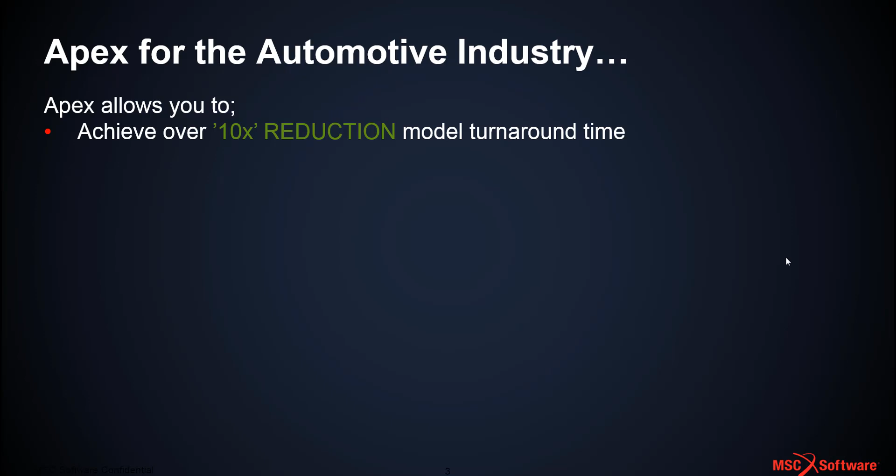Apex for the automotive industry. Apex allows you to achieve a 10x reduction in model turnaround time, so massive efficiency gains both in terms of the power of the software and also the flexibility offered by very many of the functions in Apex.

It makes the user experience enjoyable, so many users see Apex as very easy to learn, easy to use. Many people liken it to using a video game in terms of how enjoyable it is. It opens up the analysis process to non-specialists, so junior engineers and non-FEA specialists can become productive with Apex very quickly and perform many aspects of the FEA and CAE model build task.

It gives flexible license access across the MSC One licensing portfolio, so floating license availability and the ability to open up other MSC software technologies such as MSC Nastran, Marc and Adams multi-body dynamics.

It integrates radically powerful FEA and automation techniques into flexible architecture, so many patented and novel technologies, direct modelling focused specifically for CAE and FEA model build, generative model framework where any modification upstream is washed down, so we've got minimal user input, and we've also got a very powerful automation base using the Python technology built into Apex.

These capabilities are very prevalent in the automotive industry, and we all know how important robust FEA is within that development process. Apex gives you the design freedom to develop your current and future products in a manner you have never seen before, and I want to sort of highlight that.

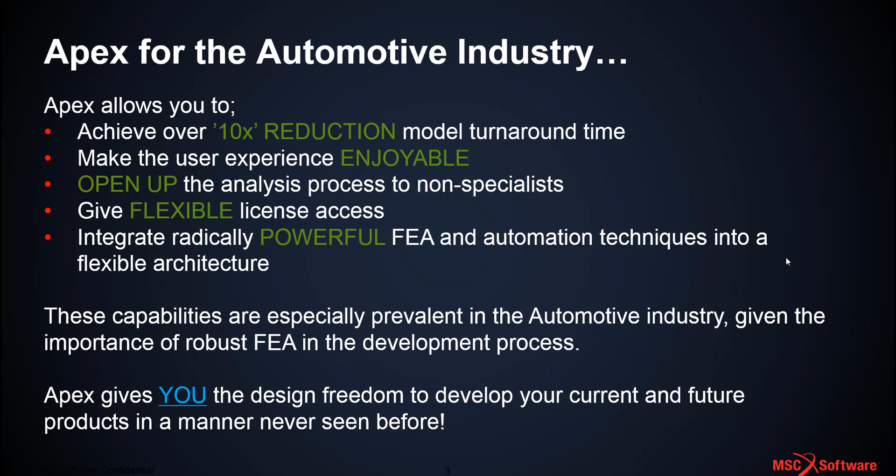The efficiency gains and the power of Apex means that you can build models, analyse and understand how a structure is going to work far more quickly and efficiently over anything else you've ever seen.

The Apex journey. So early versions of Apex were easy to use, easy to learn. They were focused on a CAD to mesh type paradigm, so import geometry and then kick out a Nastran bulk data file. Then the software has evolved to include the Apex structures simulation environment.

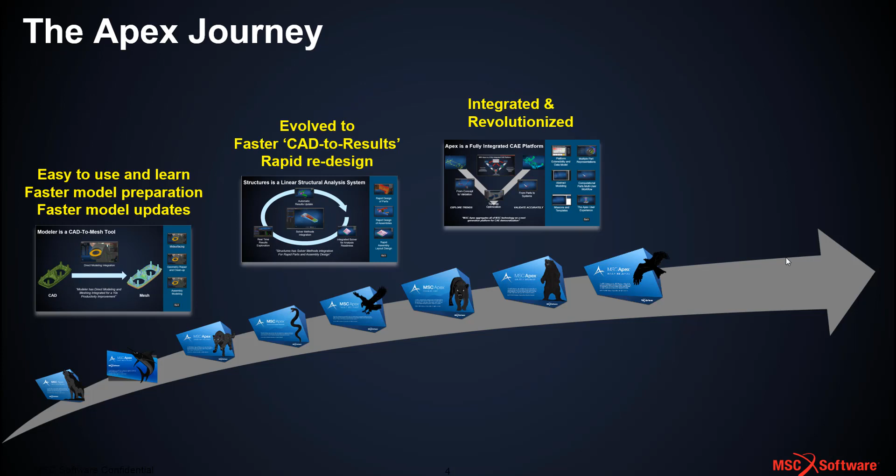So you can actually go from CAD to results in a very rapid time frame, allowing rapid redesign and what-if scenarios. Then the platform has been integrated and revolutionized with the advent of the Python automation technology, so you can automate, black box and customize the environment.

But then there's been a paradigm shift in terms of the way Apex is developed and positioned, to now include, for this release, Apex Iberian Lynx, the concept of gateway to Nastran through a series of interoperability enhancements. So now Apex can talk to Nastran both as a preprocessor and also as a post-processor.

With Iberian Lynx, this is all now possible.

So workflow maturity: a legacy approach used Patran or some other third-party tool for both pre and post, wrapped around MSC Nastran. As Apex evolved, it came in as a companion tool, which means you can go CAD to mesh effectively, then drop that into Patran or a third-party tool as a preprocessor, and then onto Nastran and Patran again for post-processing.

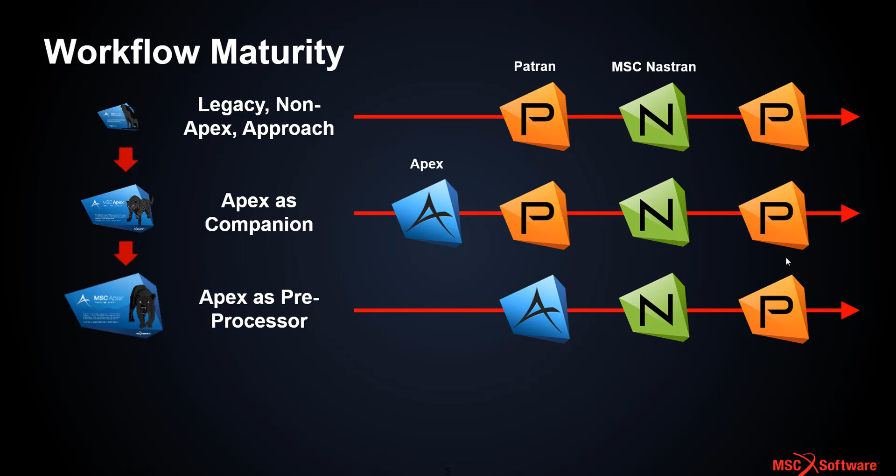Then Apex became a full preprocessor, so you can do all of your model build, analysis and load case setup within the Apex environment, solve externally, but then still have to post-process in a third-party tool.

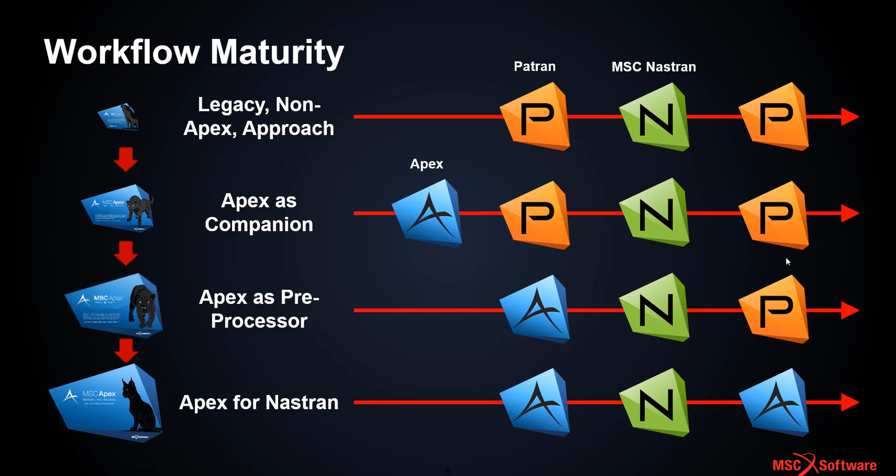But now, where we are with the Apex for Nastran functionality, we've got the capability to do full model build, full load case definition, full scenario setup, Nastran external solve, and then full post-process and result simulation within the Apex environment. Functionality growth - going through this pretty quickly.

So the early versions of Apex using the companion mode had some keyword support for a CAD to mesh type operation, but as Apex has matured, we've included more analysis setup and solution types, primarily by using Apex as a full preprocessor.

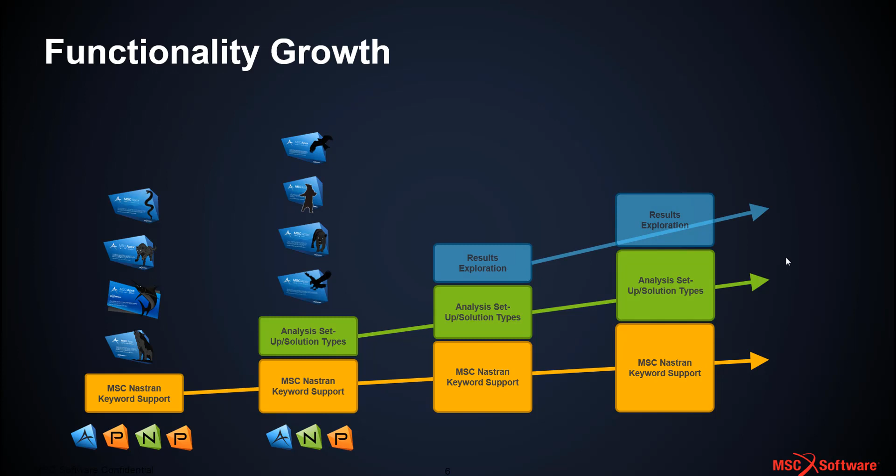And now with the advent of MSC Apex Iberian Lynx, where we can support all of the preprocessor phase and pretty much all of the post-processing and result exploration phase, we've got a much more full user experience and workflow.

Result exploration, as shown, is increasing with future releases, and orphan mesh control is increasing with future releases. Orphan mesh definition is where you work on a model where you've only got legacy Nastran bulk data file definition - you don't have geometry, so you need to use the original mesh as topology for subsequent updates and modifications.

So how can Apex improve your productivity? Apex is now implicit in your MSC Nastran workflow. In simple terms, you can ditch your other third-party or Patran toolsets for Apex Iberian Lynx to become your main CAE workhorse.

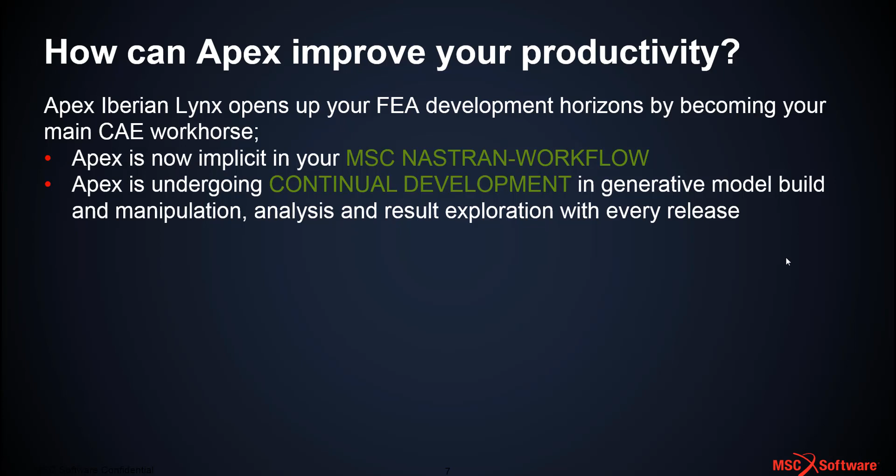Apex is undergoing continual development in model build and manipulation, analysis and result exploration, with significant functionality improvements and enhancements with every release. The Python-based automation environment now offers build, but also analysis and result exploration, which is new to Iberian Lynx, all enabled through the customizable user-defined tool and graphical user interface functionality.

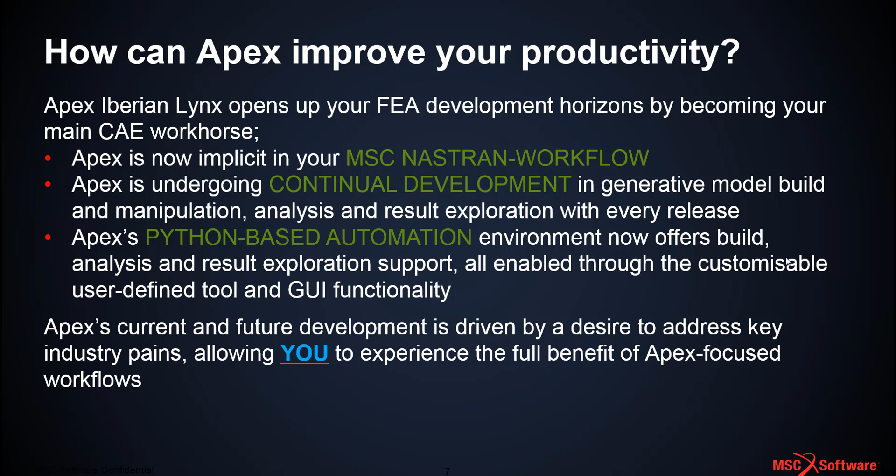Apex's current and future development is driven by a desire to address key industry pains, allowing you to experience the full benefit of Apex-focused workflows.

So we'll move on to a couple of examples focused specifically on the automotive industry, and I've tried to highlight models which will be of interest and highlight some of the capabilities that Apex has got.

So just looking at this assembly brought in from a Parasolid CAD definition within the Apex environment, fairly complex, a number of parts, maybe 20 or 30 or so discrete parts within that. So Apex brings in the geometry and understands the full product assembly architecture, both in terms of parts and sub-assemblies.

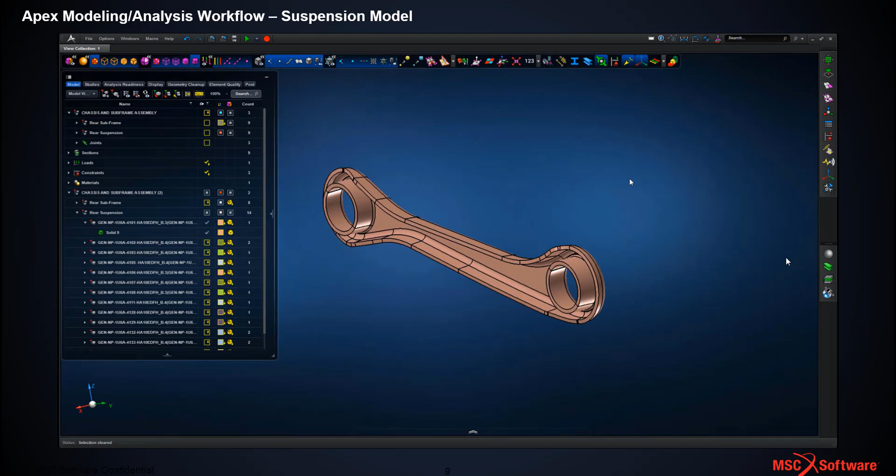Looking at the lower control arm, we're going to focus on part of the model build at that level just to get started. So if you've never seen Apex before, just a quick intro to some of the model build analysis setup tools. So, mid-surfacing operation - we've pulled the mid-surface and calculated the equivalent shell thickness for that mid-surface.

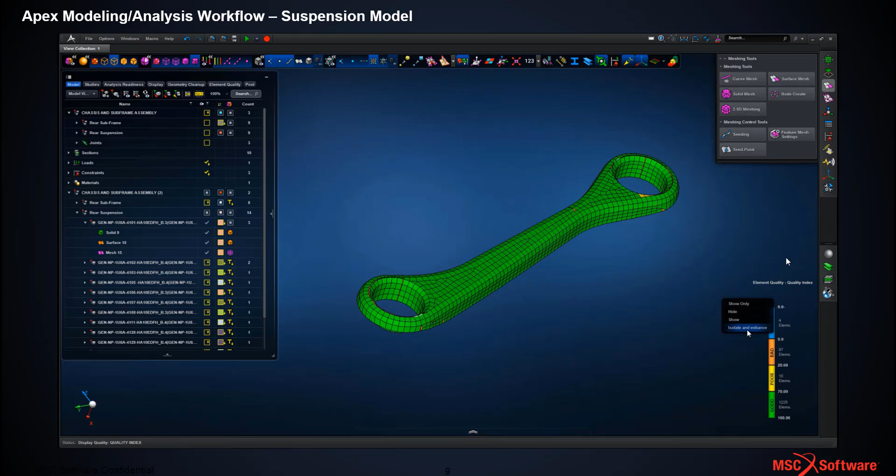We're going to shell mesh that surface, show the elements that generated, and do a quick element quality verification on that definition. Apex has very powerful quality and model update tools.

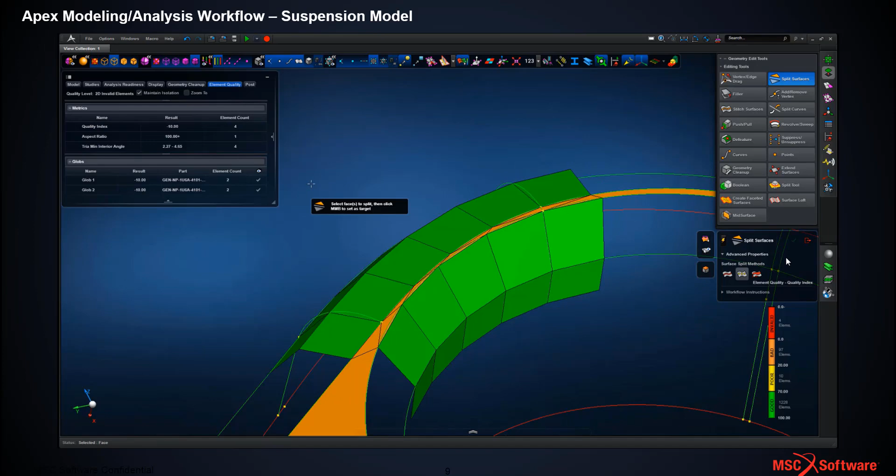So we can see here we've got some invalid elements, very poor quality in certain regions, and we can see those highlighted. So the generative nature of Apex means that we can split surfaces, which in turn update the geometry, the properties, the mesh in a generative framework, and we can see that live in terms of the element quality check. So those elements disappear because they're now good quality, and we repeat that for a second portion of the model.

So we make these splits, and again, minimal mouse clicks, minimal form interaction, controlled pretty much completely from the mouse. We can now see we have good quality elements everywhere, or rather no poor quality elements, I should say. So this model definition is good to go.

So one of the neat tricks within Apex is that we've got the ability to verify using the embedded Apex solver. So we can just look at the shell thicknesses first of all, an element normal check just to ensure that we've got element normal consistency.

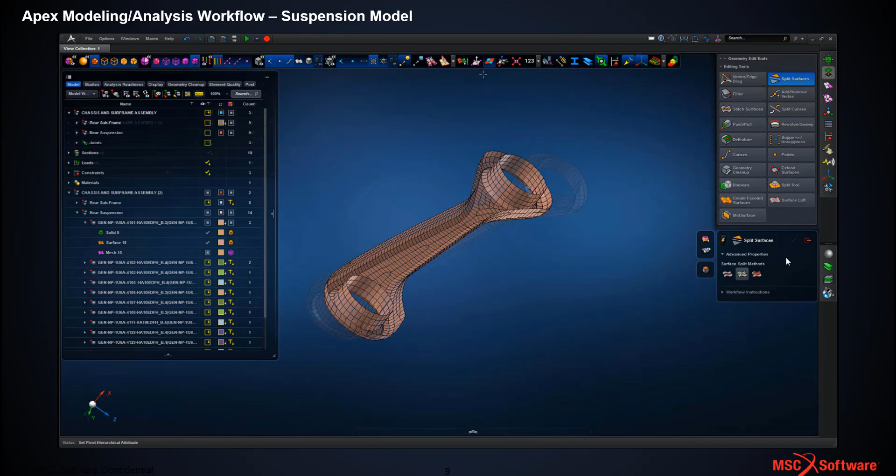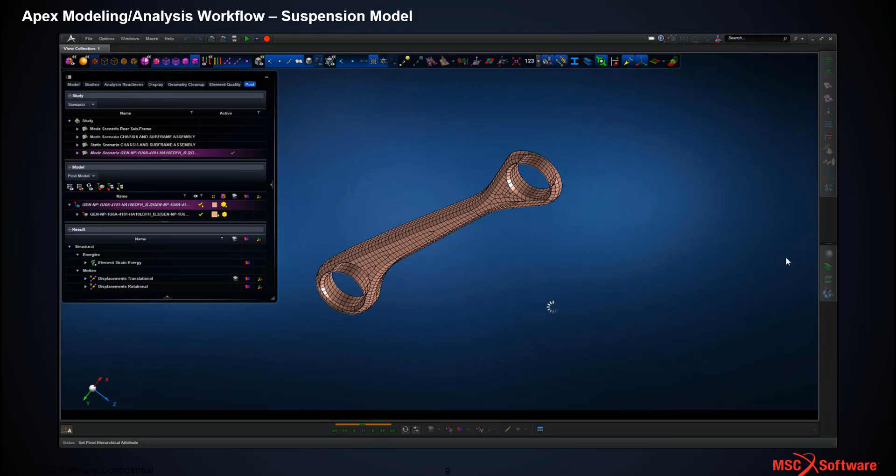Obviously that's important given that we're using shell elements, and we can now verify the response of that single part within the sub-assembly using the Apex embedded solver, looking at normal modes, free analysis, run the solution very quickly, and see the influence that structure would have, just to make sure that it's tied together properly and responds from an analysis perspective as we so desire.

And we can see here we've got for a free modal analysis, 6 rigid body modes and then 7 plus flexible body modes, and we can see that the structure is working as we would expect.

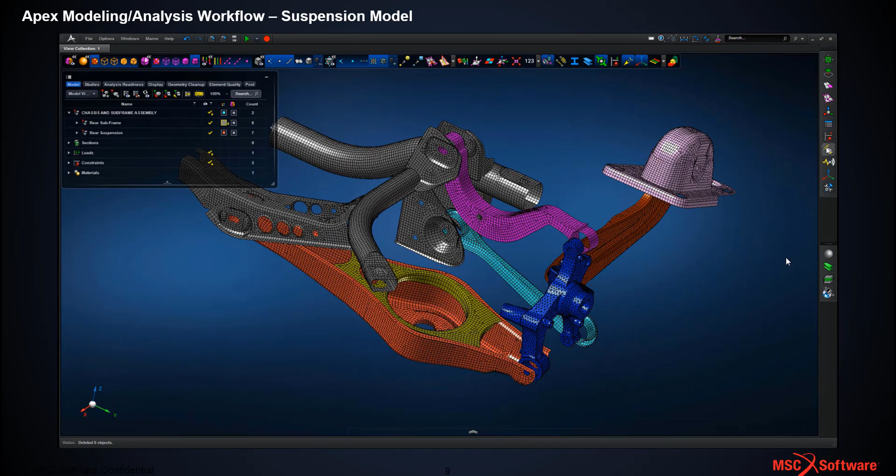So once we've got that part verified, we can quickly build the other parts through a mid-surfacing or solid mesh focus. We need to tie these entities together.

So just tie these - we've got some welded entities at this particular component pair. So we've just used the Apex glue technology just to tie those together, and we can change the tolerances to better control those interfaces. We can use the concept of a joint definition to tie, in this instance, the pink region to the blue region using a revolute joint.

We've got many different joint types in Apex.

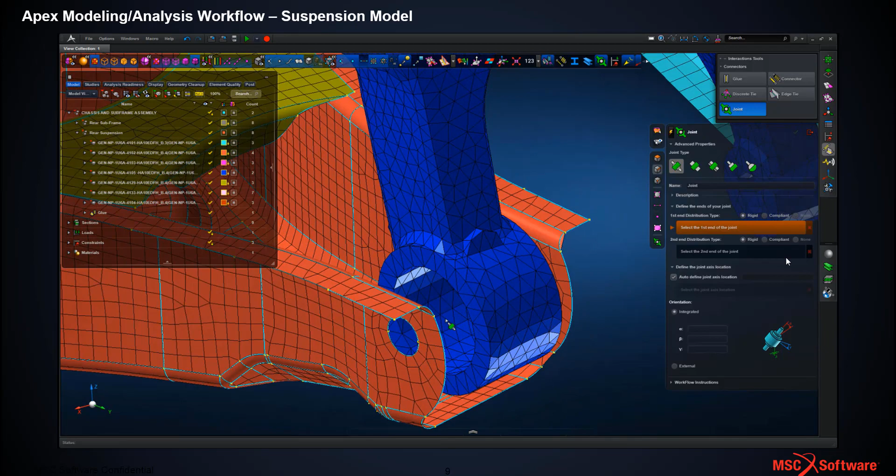So just pick the entities at one end we want connected. So these will be the internal bores of the holes for the pink surface.

So this is effectively generating a fastener stroke bearing interface to give us the revolute behavior. So pick the solid face of the blue component, middle mouse button to accept. We've got the ability to modify the position and the orientation, but by default these are concentric holes, so no manual input used whatsoever, and we've got that joint defined.

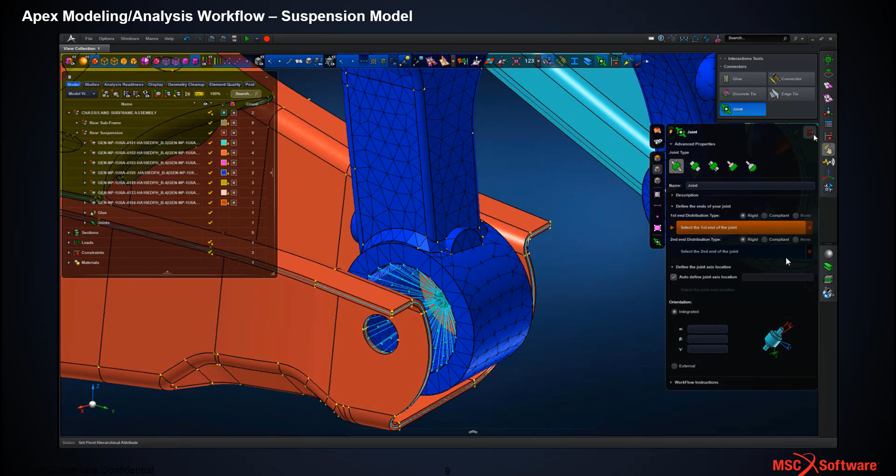The generative behavior of Apex means that if we were to remesh or modify one of these pieces of geometry, then the resultant mesh and joint definitions and all connection updates or connection definitions will be updated. So just refining that mesh to a 2mm edge length, and we can now see that joint is still robust within that definition, and that goes for all entities or connection types in Apex.

Running quick normal modes analysis, we can see that the structure is working as we expect, and we've got no moment transfer at the Revolute joints. We can look at the strain energy distribution just to understand where some of those structures would see high stresses if it was a true vibration case.

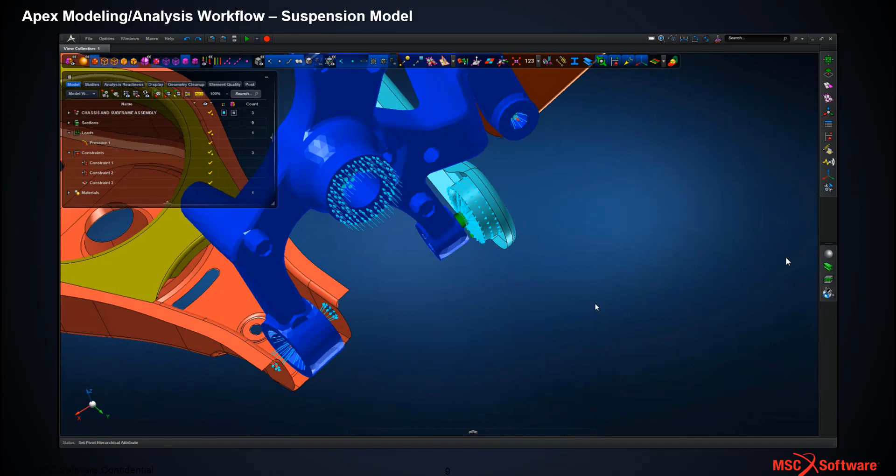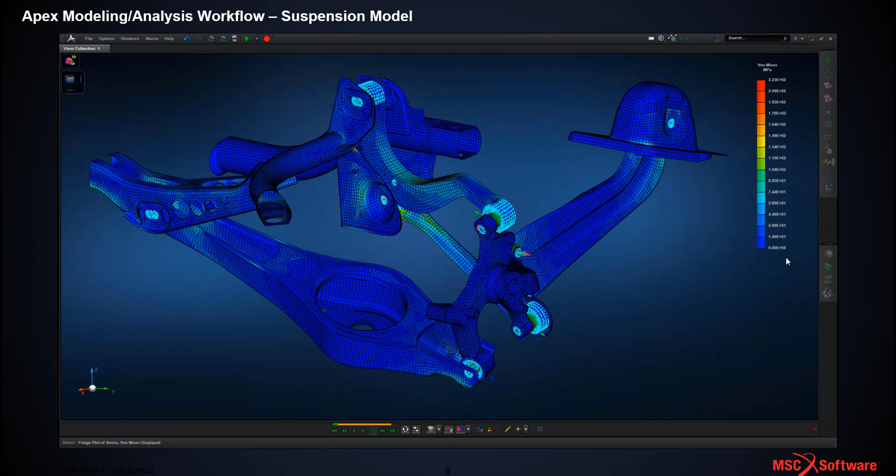Then we can look at the static output, so we've got a pressure load defined, some fixity constraints, and a symmetry constraint, as we can see here. Run the analysis, look at the deformations, and then we can start to pull the discrete stresses out for the full structure or for the lower control arm that might be a region of interest, and then we can go through the design iteration loop to update anything we might need to. So pretty straightforward from a build perspective.

So looking at the MSC Nastran workflow, specifically focused around Apex. Apex is fundamental to your Nastran workflow by having enhanced Nastran keyword support for both model import and export. We've got MSC Nastran HDF5 results out interrogation, which means we can now read results in, and we've got powerful result automation, result exploration and automation capabilities.

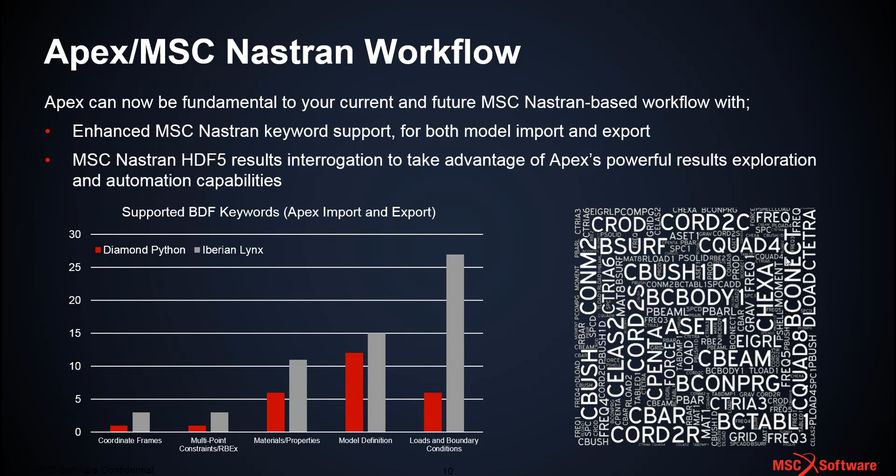Quick infographic here just to show how, on the left hand side, the number of BDF keywords are supported both for import and export within Apex. Diamond Python, shown in red, is one of the earlier releases, and Iberian Lynx is shown in grey. So the functionality enhancement, or number of keywords that are now supported, has grown hugely across those releases. We can now support coordinate frames, multi-point constraints, materials and properties, model definition, and loads and boundary conditions.

Moving into the next workflow example, the chassis model. We've got some assembly geometry read in from an external CAD source, and the assembly architecture has been fully defined and respected within the model browser tree. We've mid-surfaced and manipulated those geometries to give us a more simplified version, and then looking at the underlying mesh, we can see what that structure would look like.

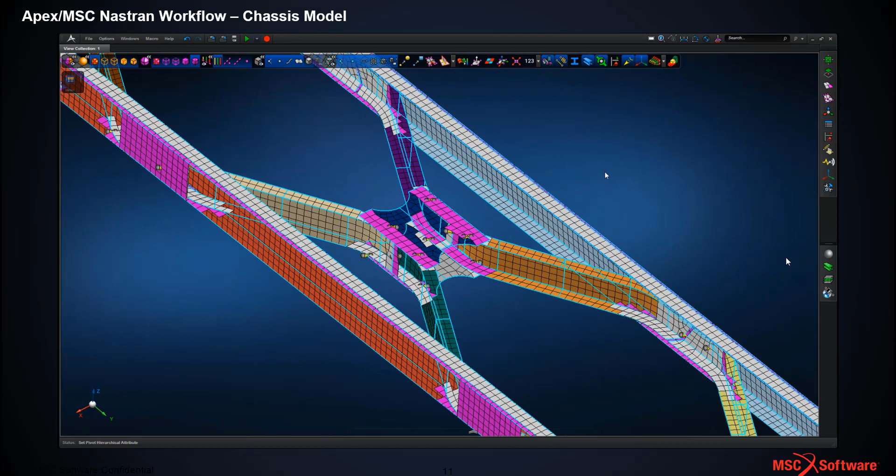We can show the equivalent shell thickness for those entities, and also look at things like glued contact. Because this is a meshless contact, we can build very quickly without having to ensure congruency of nodes and elements across the interface. We could ensure those congruencies if necessary, but we're using glue in this case for speed.

So one of the sub-assemblies, we've got glue at the sub-assembly level, so we've got 4 cross braces and a cover plate, or a series of cover plates, connecting those together.

Once we've got that definition, we can now run the full job. Just a quick check on element quality: massively dominated by good quality elements. We've got no invalid elements which would stop the analysis from running.

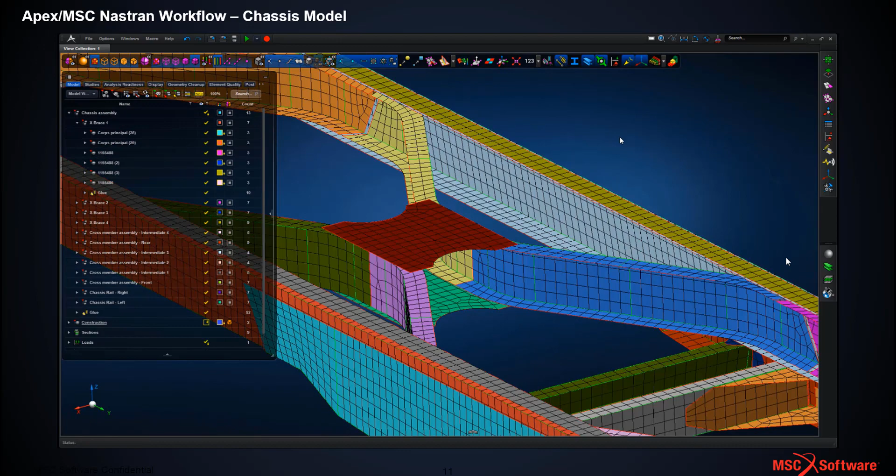We can now define our loads and boundary conditions and our loading environment. We can modify any of these at any given time, so we've got full flexibility based on the generative model description. Once we're ready to go, we can then run our external MSC Nastran analysis.

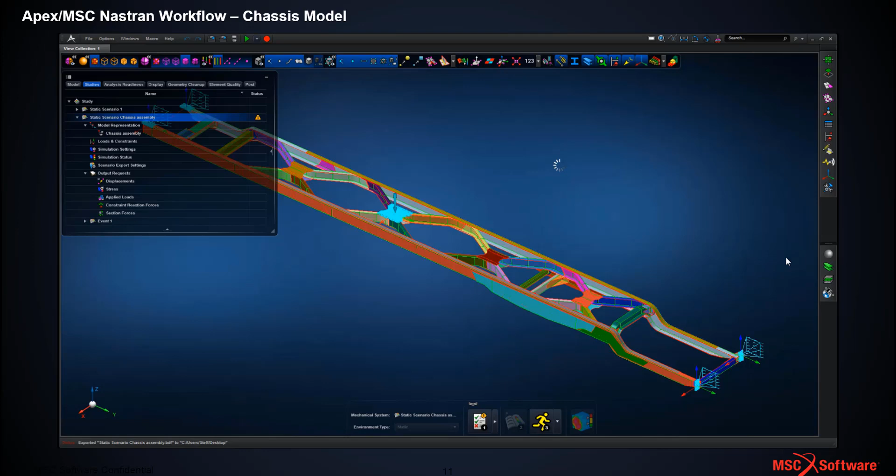So we create the scenario, which is effectively a load case, and then we can write that load case or a series of load cases out to the external MSC Nastran bulk data file for subsequent external analysis. We may have to use MSC Nastran from a certification or a client user base perspective, but once run, we can then attach the MSC Nastran HDF5 file format, read that in, and then we're into the post-processing environment that we need for MSC Apex, and we can fully understand the structural response in a manner that we couldn't do previously from an external Nastran run.

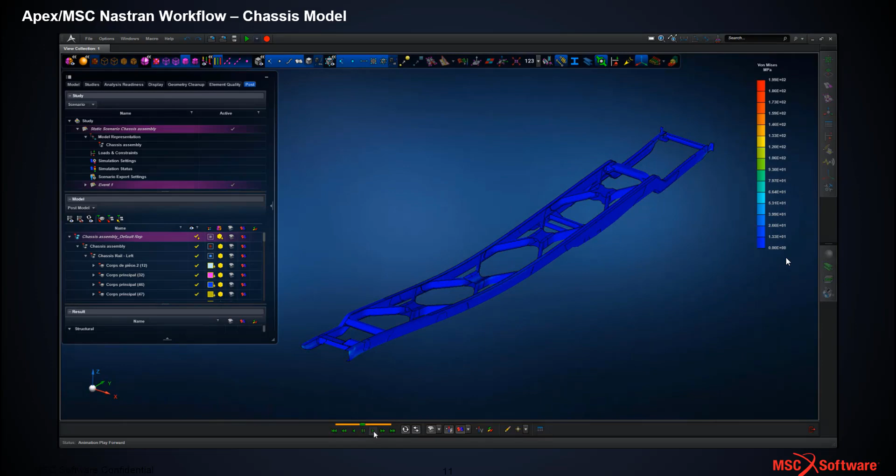So we're just looking at von Mises stresses for the shell elements and understanding the influence of the load case and where those stresses are going to peak.

Now looking at an Orphan mesh workflow, we're going to bring in the same bulk data file that we used for the original chassis representation. We can preview the model as it comes in, we can look at the number of keywords, we can change the unit system, we can specify how the model is going to be organised.

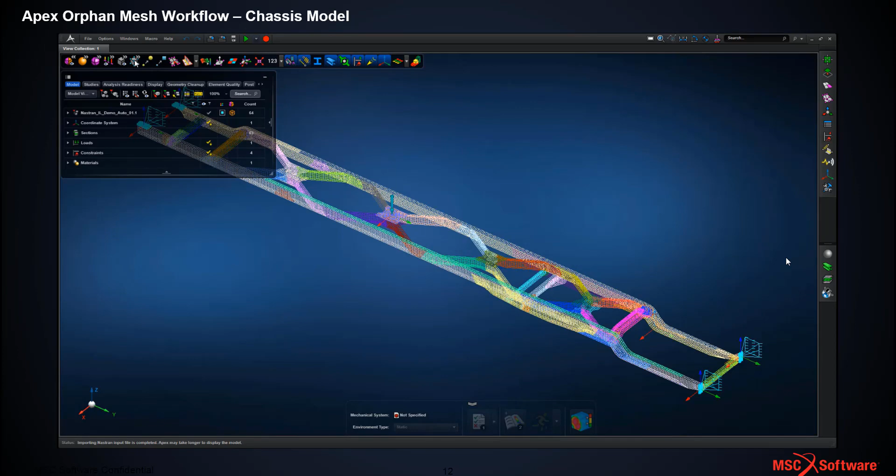So we're going to organise this model by what we call a contiguous mesh region, so each unique meshed entity has its own place within the subassembly architecture, and in the model browser tree we can see that. Let's go to rendered mode so we can see a bit more clearly. If we expand the model browser tree, we can look at discrete parts within that assembly, and now we've got the Orphan mesh, so there's no geometry in this model.

So what we're going to do is modify these structural members by first of all turning them into geometry.

So we're going mesh to CAD rather than CAD to mesh. This creates faceted surfaces for planar, curved and doubly curved geometry. Very good control by default, but we've got user control, more involved user control if necessary.

So we can go back into the model browser, post the full extent of the model, and see where those new faceted surfaces have been generated, and we can delete those mesh definitions where we don't need them and just retain the faceted geometry. So deleting those from the model browser tree, we don't need to do anything from a form or user selection perspective.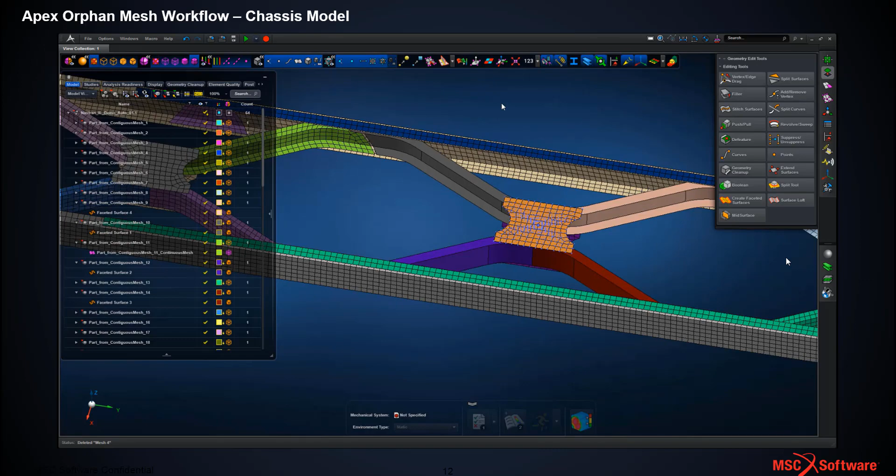So the mesh has disappeared from those entities. We just show only those entities to screen, and now we can manipulate those entities as we see fit.

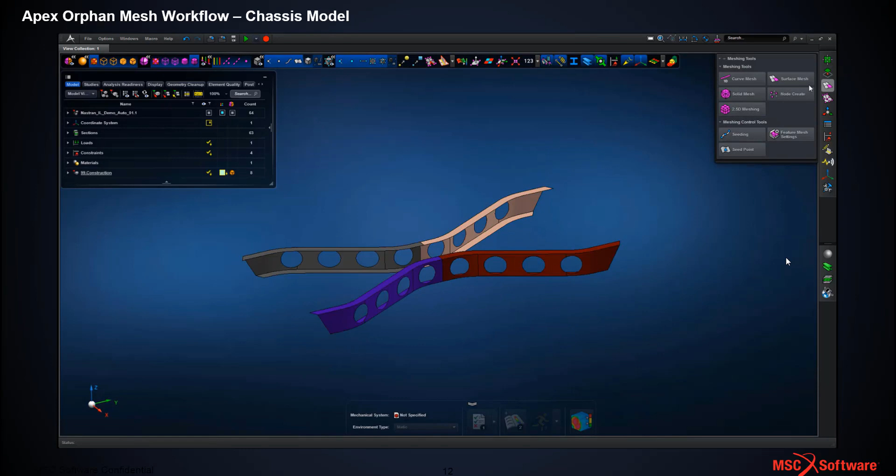So what we're going to do here is introduce some lightening holes into the geometry. We've got these cylinders we already created using the sketch and 3D manipulation toolset, and punching out those holes in the faceted geometry, we can now remesh those surfaces with a much smaller element edge length. Again, good quality mesh defined very quickly and easily.

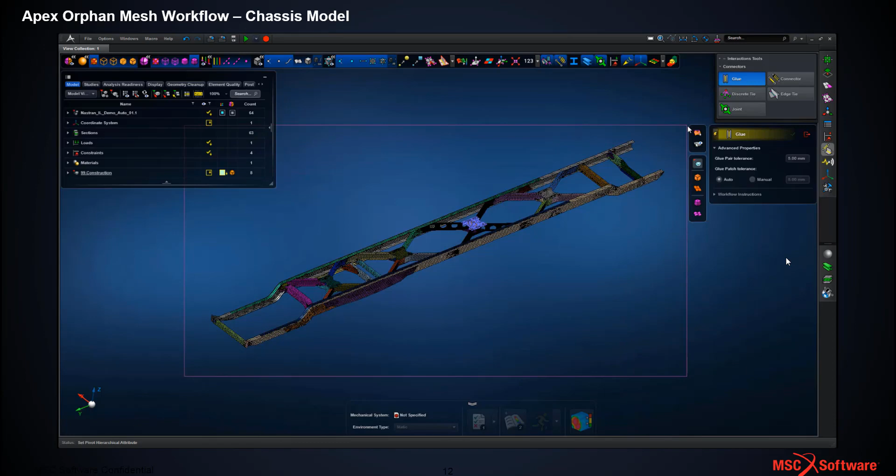We've got the shell properties retained from the original model, so we don't need to repropertize those entities. Once we've got that topology definition built, we can use the glue connection, again a meshless technique, to tie everything together. Basically a series of explicit MPC equations behind the scenes, but very efficient in terms of connection and ensuring accurate load transfer across interfaces.

Once we've got those definitions built, we can run the analysis and look at the response of the updated orphan mesh region. We haven't updated the upper and lower plates at this stage, but we could have done. So just changing some of the deformed plot scale options, running a deformation analysis, and then looking at the stress distribution for the entire model, and also for the region of interest where we've made those local changes.

Again, so it's a very quick means of working with the orphan mesh.

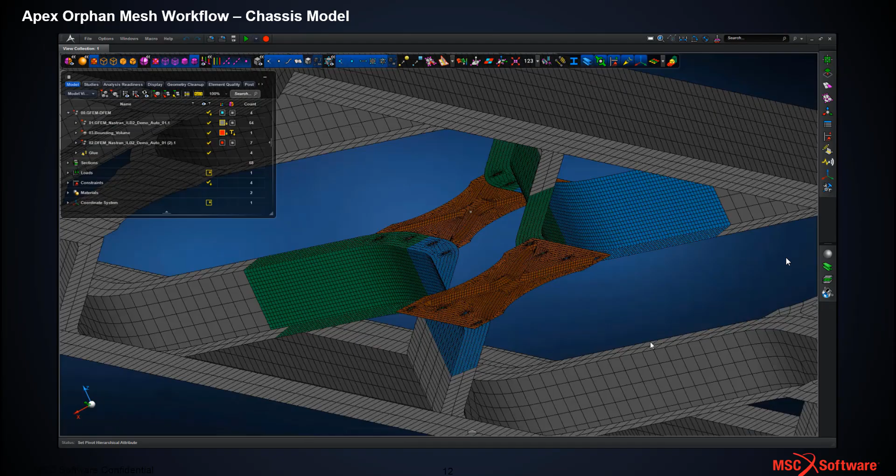Second approach, where we've created orphan mesh for the original cross members, but we've also introduced some CAD geometry to have a mix of orphan and CAD based approach. We've punched some holes in, we've got glued contact between the fine and coarse meshes, and we can now run that analysis again using the implicit Apex structure solver or the external Nastran approach, and see where we are with that structure. Very quick to do that in Apex.

Apex sits well in terms of the Adams multi-body dynamics toolset, so there's an efficient workflow for that. Apex can be fundamental in that MBD process.

So Apex has the concept of analysis readiness, which effectively means that we can generate a valid FEA model very quickly and generate or create what's called the modal neutral file, the MNF file, for the Adams flexible body definition.

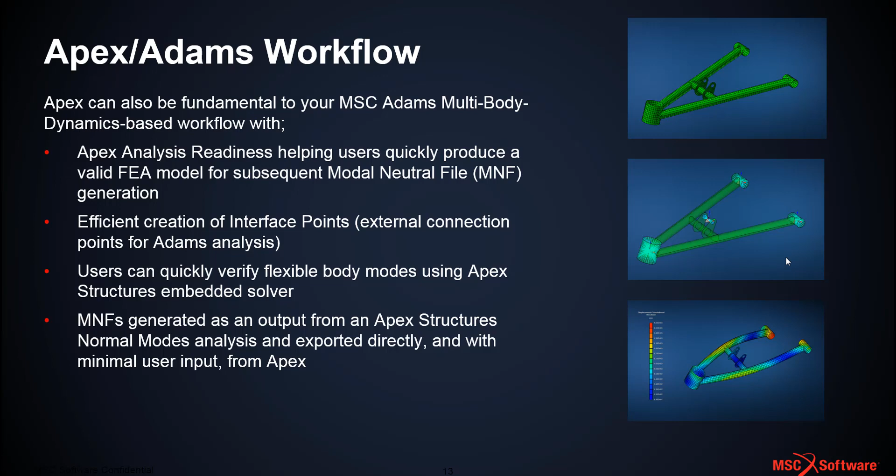User can generate or verify the modal behavior of the structure using the embedded Apex solver, and once that's been done, the modal neutral file, the MNF, is generated directly as an output from the Apex structure's normal modes analysis and can be brought directly into the Adams environment.

The way that the modal neutral file is brought into Adams can be defined using an Adams plugin, and a quick overview of the process.

So we start the Adams toolset, and here we can see for this suspension linkage we've got rigid body components shown in grey.

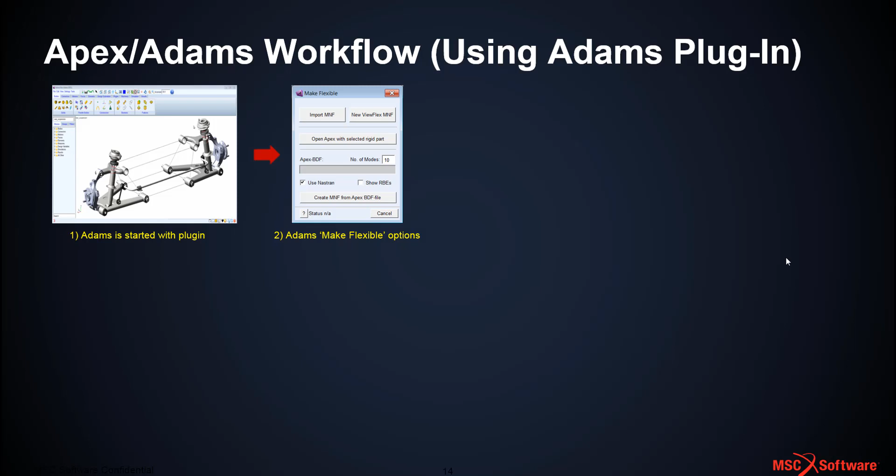We can then specify the Adams make flexible options and import the output generated from Apex. So go into the Apex environment and generate either the modal neutral file or a Nastran BDF file.

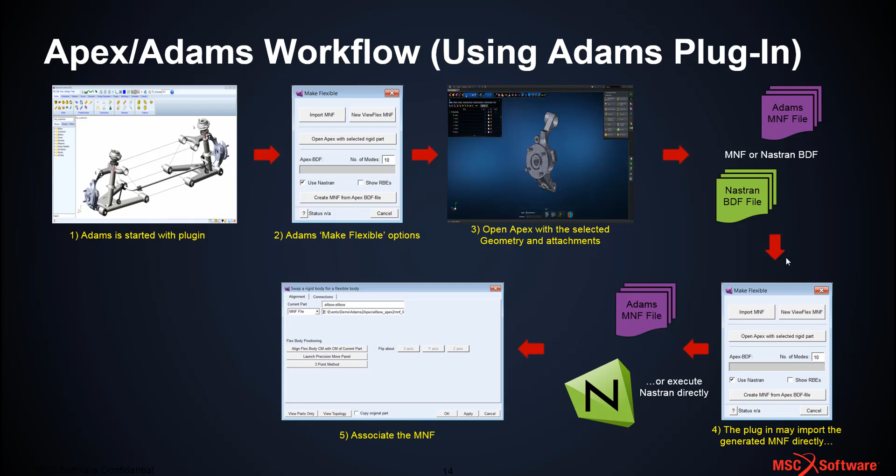And then read that information again back into the Adams environment, either directly as the MNF file or execute Nastran directly to generate the MNF file, associate the MNF file with the Adams assembly, and then the component is replaced with a flexible body for much more accurate multi-body dynamics and dynamic stress extraction within the Adams environment.

Something that comes up quite regularly with Apex development, especially for automotive structures, is how does Apex deal with welded structures. So as Evotech, we've put together a 25-minute tutorial which covers a number of different weld modelling techniques: the nominal stress method, the structural hotspot method, and the effective notch stress method.

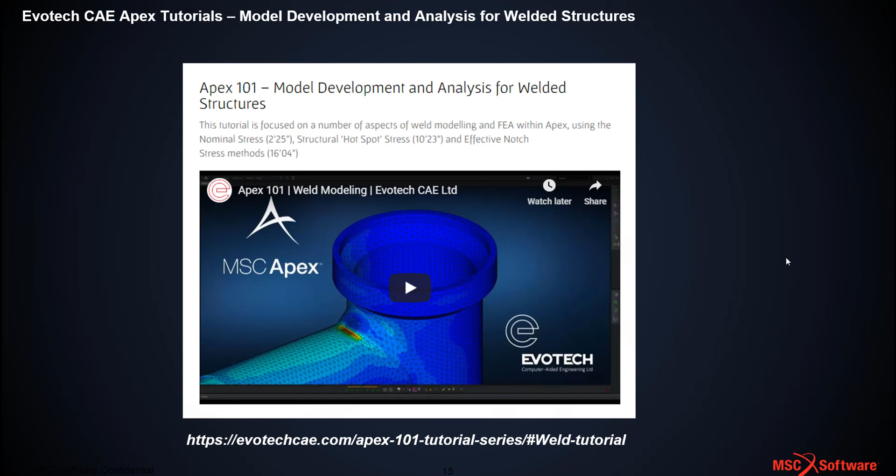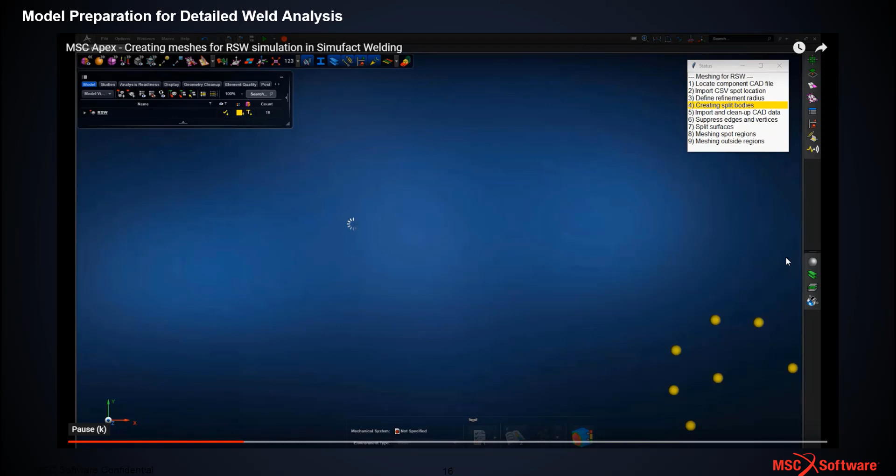Another weld example where Apex has become very useful is within the interface with another MSC toolset, Simufact Welding, run from a macro environment where the user specifies an assembly. This brings in some geometry and a CSV file of spot weld locations, based on user input for where those spot welds are located. The geometry is brought in and the script runs with no manual input whatsoever.

Meshing those entities involves first splitting them based around the spot weld locations, generating the split lines, and then remeshing those entities. We've got a detailed pink region on screen that's going to be meshed and then tied into the more global blue region, with the appropriate element edge lengths for that resultant spot weld analysis within Simufact Welding.

So again, a big efficiency gain here using Apex in an automated approach to control the full model. Looking at the resultant model definition, we can now see those spot weld local mesh controls for our subsequent spot weld analysis, very straightforward to do within Apex.

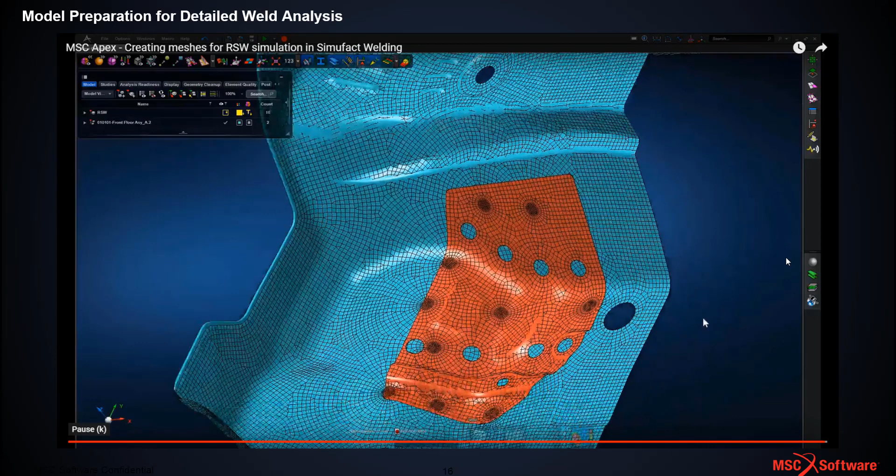Some of the discrete enhancements we've seen within this Iberian Lynx release include a number of geometry enhancements. We've seen this certainly in terms of lofting, but we've now got more mature, more evolved CAD type tools such as revolve, extrude, sweep, and lofting, which comes in very handy.

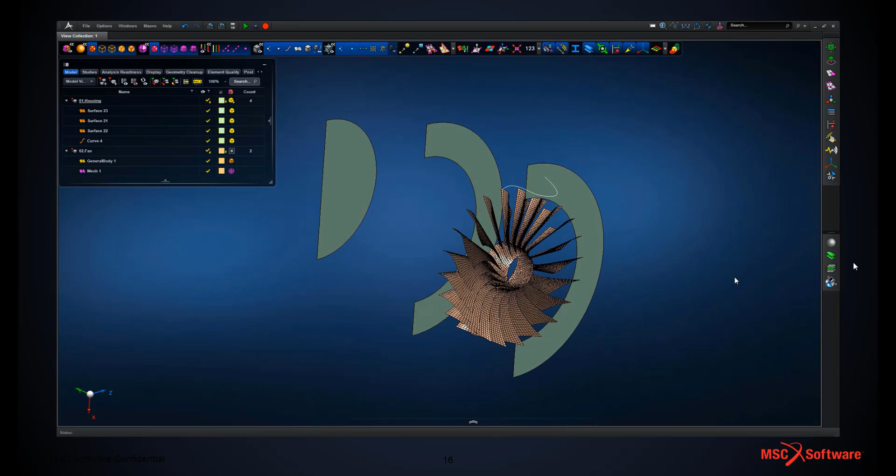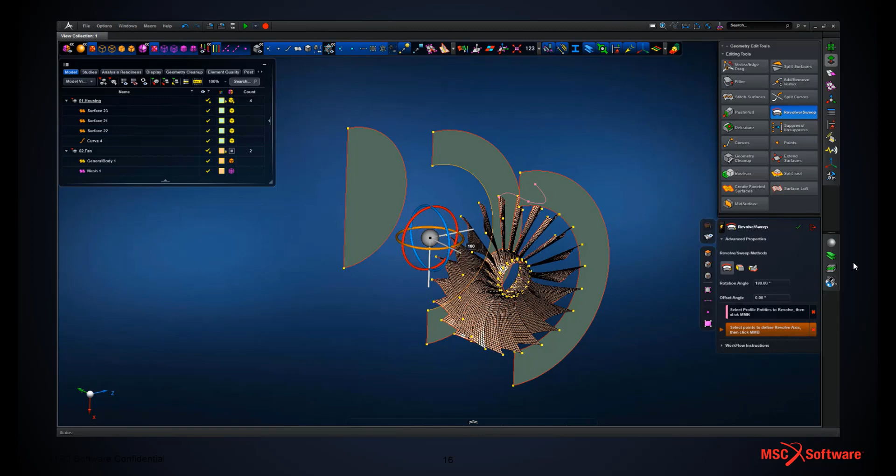Looking at this quick example of a simple jet engine cowling, we're going to revolve the curve at the front that we've just highlighted and spin it around an axis. We're taking advantage of the Apex magic markers, which allow us to pick things like endpoints and arc centers on the fly. We use the rotation axes, with full manual control, and we can see a preview of that surface, then middle mouse button to accept, giving us the front of the engine cowling revolved to give us the surface on screen.

So we've got the front of the structure built. Now we're going to look at lofting a surface, picking a series of non-connected curves and building a surface that passes through those curves in a spline sense. We've got full control over edge continuity and edge tangency, to give us the structure that we want.

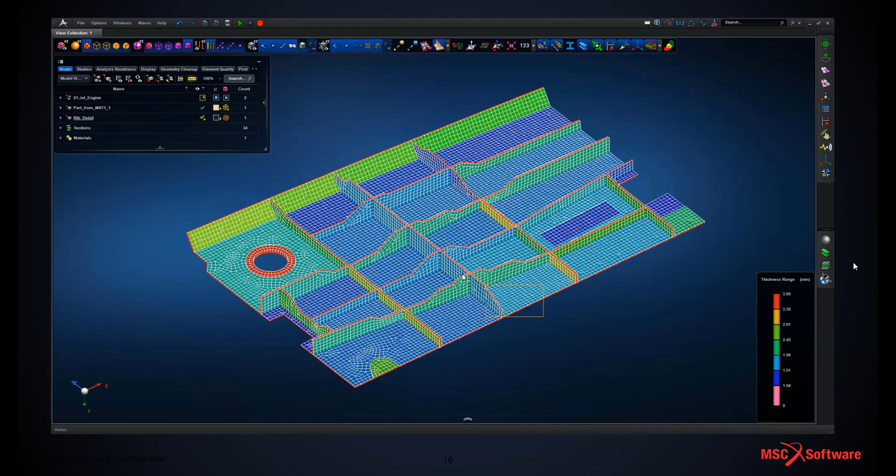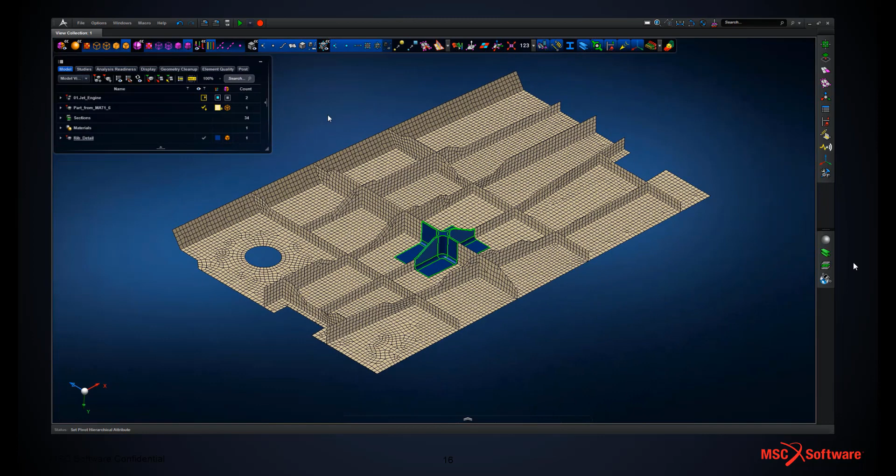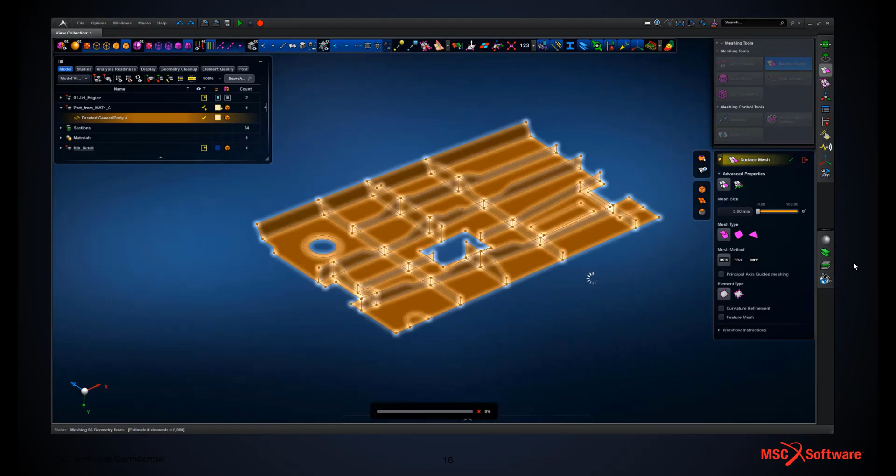Once we have the mesh we want to work with, we create faceted surfaces from that mesh. We pick the mesh, middle mouse button to accept using the defaults in this case. It's built a whole bunch of surfaces from those original shell elements. Of course, this could be done in an automation sense. We've got flat surfaces here, but it would work equally for curved surfaces.

We've remeshed the structure using a new element edge length, and we've got full control now with this faceted surface geometry if we wanted to generate further modifications, so we can seed that surface if necessary. Key here is that the faceted surfaces remembered the underlying shell thicknesses, so we don't need to repropertize - that's taken care of. So we've dropped in a portion of 3D mesh geometry.

We can glue those components together using the standard glue connector technology, and then run the model. So a very quick way to work with an orphan bulk data file definition and modify it to introduce new geometry as required.

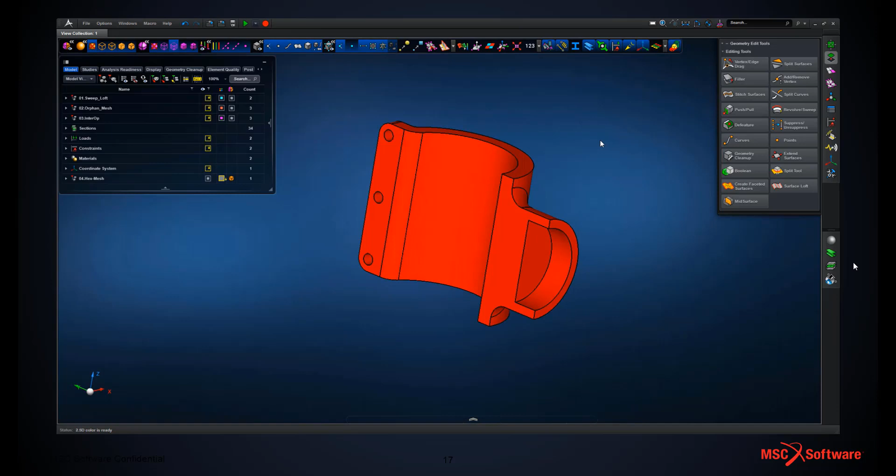Some of the Iberian Lynx meshing enhancements include the concept of mesh diagnosis, or meshability, introduced in this release. Looking at a quick example of a tube interface, or tube bracket, we can 2D mesh that, or 2.5D mesh, hex mesh that, but some of the element quality isn't that great.

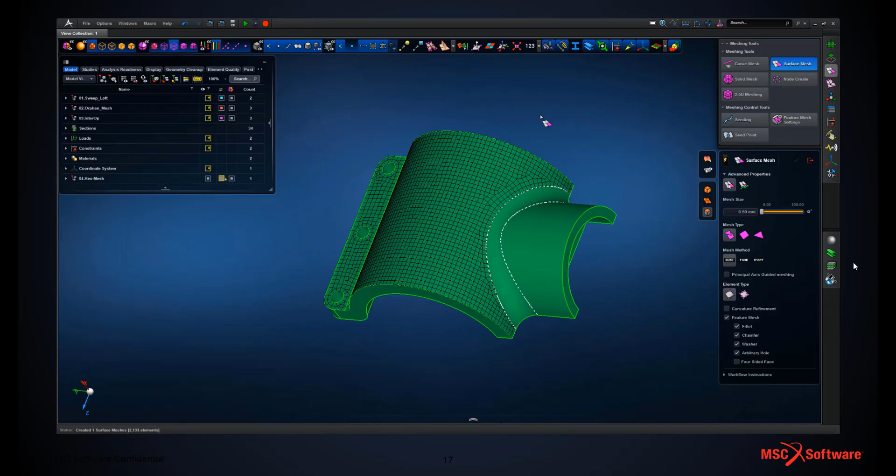We're going to look at surface meshing these faces to drive the underlying hex mesher in the regions shown, with different mesh across different regions. We can now see the fillet regions turned yellow, meaning we're not able to mesh that. So we use the diagnose meshability tool and see we've actually got a mismatch in the edge seeding in this region. We just match those seeds up, and the solid turns green again, meaning it's hex meshable. We can hex mesh the whole thing, and do a quick check on the quality - a very good quality hex mesh defined very quickly using that mesh diagnosis tool within hex meshing.

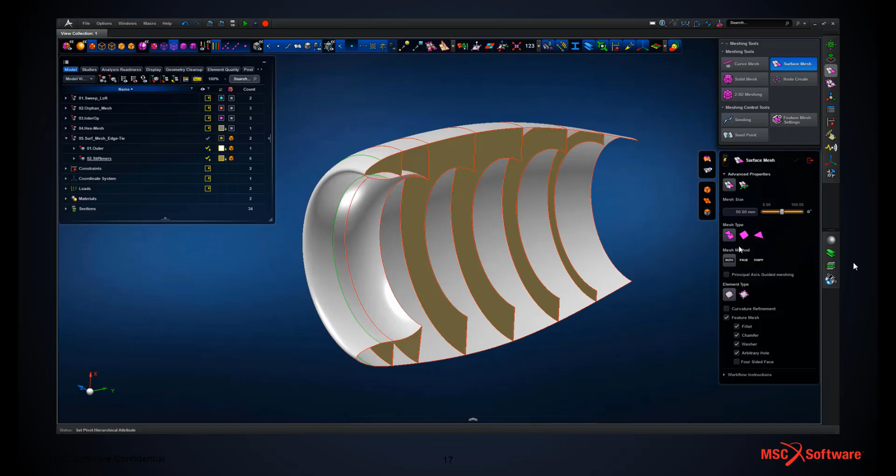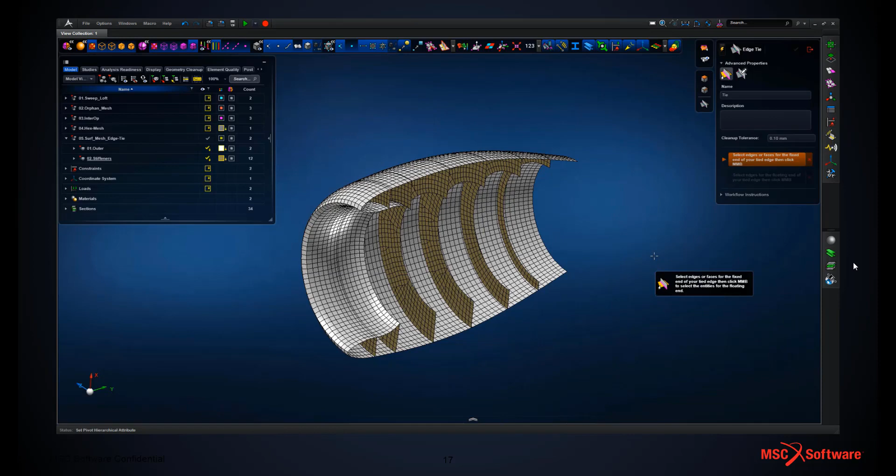We can look at edge tie enhancements. We're looking at this jet engine cowling, where we might have some internal stiffeners in a separate part or sub-assembly within the Apex framework. We can see we don't have mesh congruency at those interfaces, but we're still maintaining the unique part definition, keeping them separate rather than merging into one part.

We need to use the concept of the edge tie to tie these discrete regions together. We just wait for the mesh ties, and now the meshes are tied together between those discrete parts within the sub-assembly or assembly architecture. Let's look at the edge tie on its own.

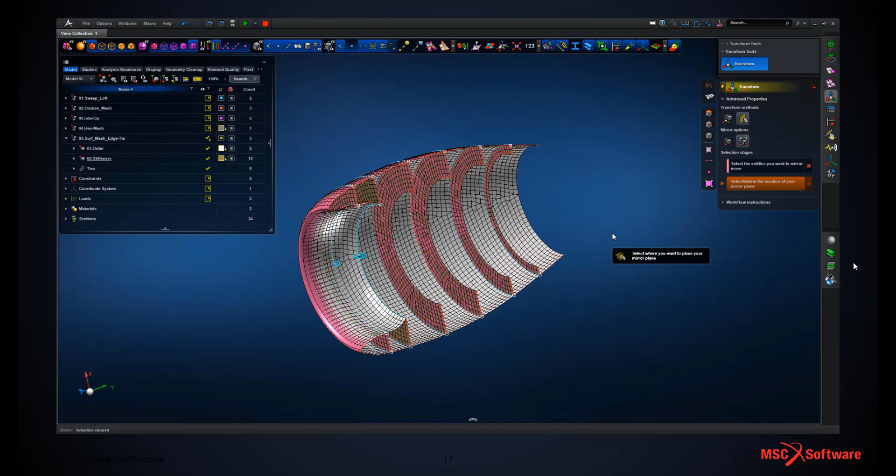For Iberian Lynx, the big change is that we can now mirror, transform, and modify those edge ties as a function of the total model. We're just going to rotate or mirror that model round, and look at the resultant edge ties that are generated - it's mirrored the edge ties as well. So we've got full mesh control at that level, and we can run analysis for the fully tied model just to show the local behaviour.

Incremental surface meshing, and some shell orientation modifications have been introduced. In this quick example we've got 4 holes in the surface. One hole is very close to one of the edges, so the standard feature mesh definition has not been defined for the hole near the edge.

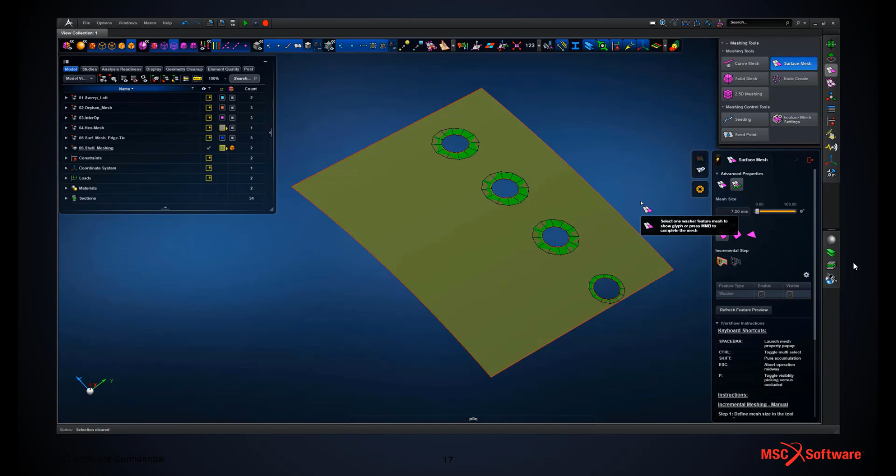Using the incremental surface mesher, it will mesh the features as it sees them. Here it's found the hole, shown in red, and says we can't fit that washer in. So we can change the washer width, decreasing it for that single region, and then remesh the whole structure, and those features are preserved within the full mesh definition. We've got the ring of elements as required.

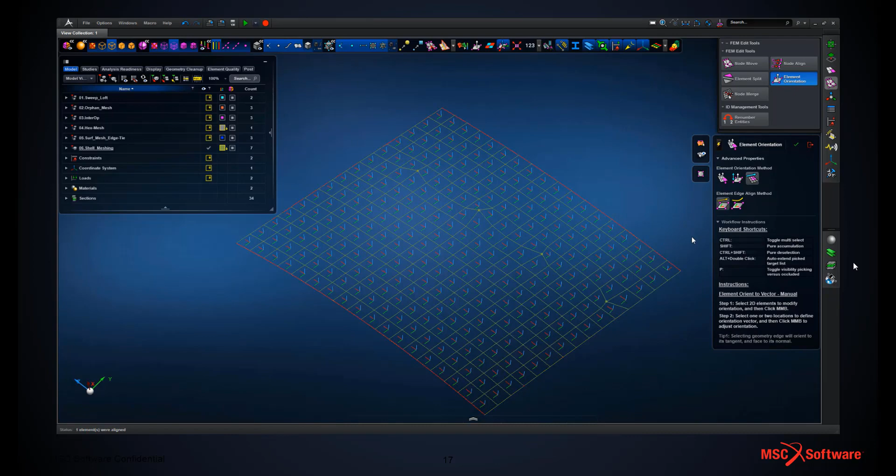One thing very important in an aerospace environment, especially for downstream hand calcs, is to ensure element alignment for a given region. We've got shell elements with the x-axis originally pointing parallel with the long edge. We're changing those now so they're all pointing parallel with the shorter edge - a simple rotation of those element XY orientations to make sure we've got element and result consistency in those XY directions.

Nastran interop enhancements: we've got ID management, the ability to renumber entities, and coordinate system definition. We've got discrete ties now fully supported, so that's RBE2s and RBE3s. Let's look at this quick example.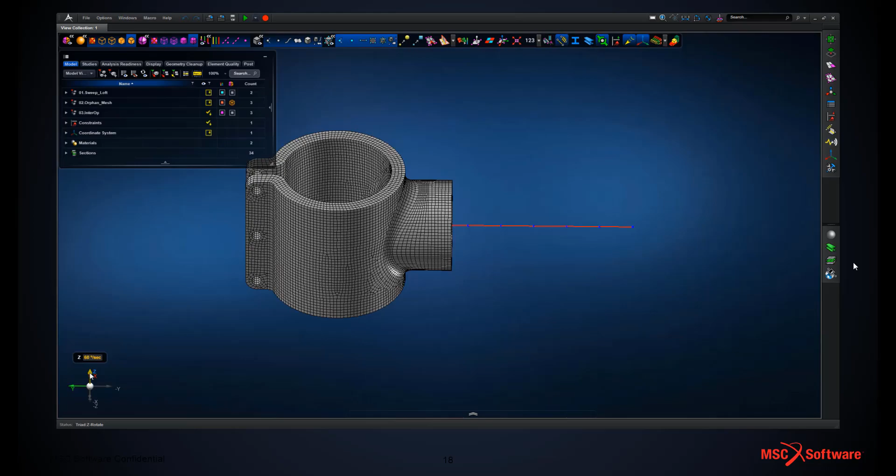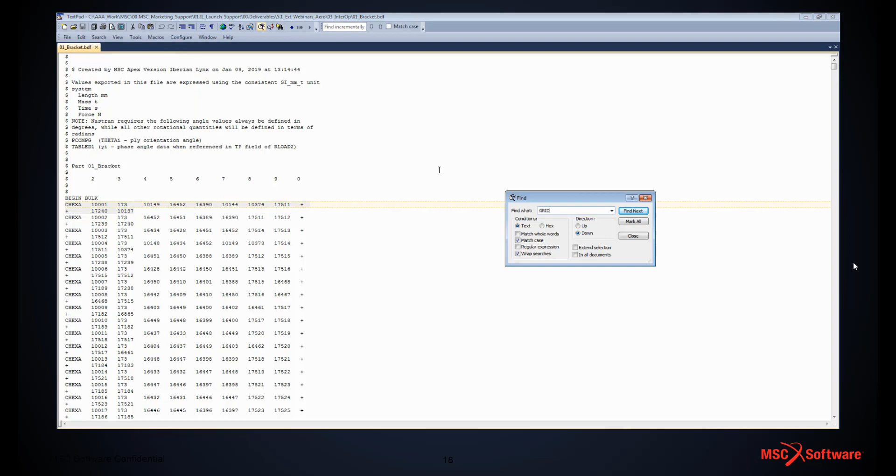We've got this tube into bracket scenario, with the hex mesh as shown, and a bar element representing the tube with its equivalent section shown now. We can use the renumbering, so we're going to renumber the nodes and elements for the hex mesh region, or the hex mesh part within the assembly. Accept the defaults, and then look at the exported bulk data file and the element and grid IDs, shown in the 10,000 series as defined.

We can create coordinate frames explicitly, so we're creating a cylindrical coordinate frame parallel with the axis of this tube and defined at the central point of the tube. Once we've got those coordinate frames defined, we can renumber if we wanted to.

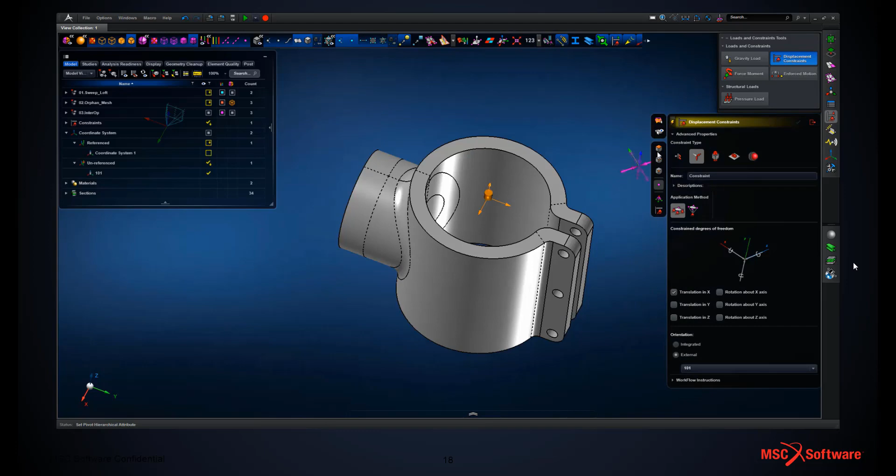We can apply loads or boundary conditions. Here we're constraining the internal faces of the tube in the radial direction of the cylindrical coordinate system, just picking out the faces - again very quick to do with an Apex environment. Middle mouse button to accept, and we've now got that boundary condition defined.

We can use a discrete tie, so we've got rigid RBE2 or compliant RBE3. Pick the faces of the geometry, then pick the center point or endpoint of the bar element, and it creates those ties explicitly. Again, this is generative, so if you just change any dimension within the model, the mesh and those tie and even those coordinate frame definitions will get updated.

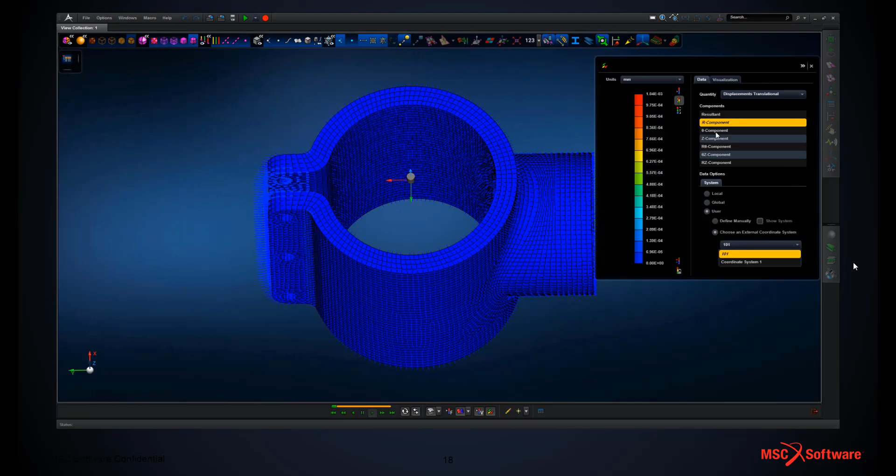So we can post-process in that local system. Just changed to an externally defined coordinate system, and then we can look at the R, theta and Z displacements. Vectors are shown on screen now, and we've got full control of that coordinate frame definition.

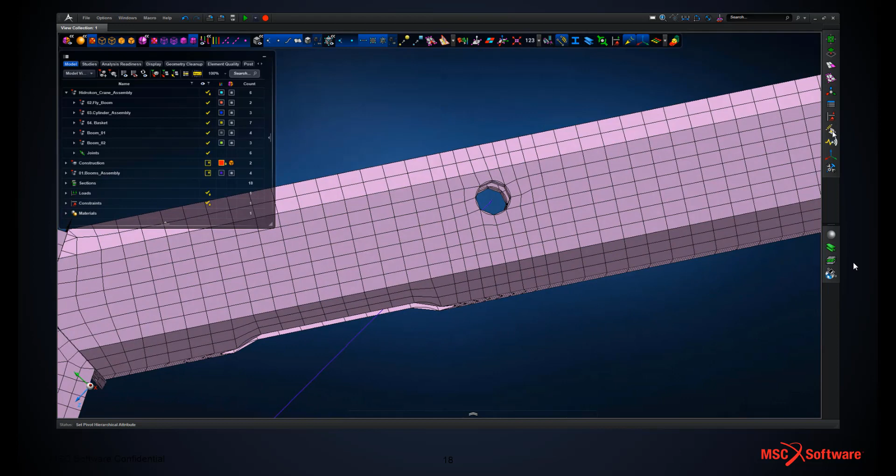We've got the concept of joints within Apex Iberian Lynx. Rather than building manually coordinate frames, local grids within particular coordinate systems, and then tying all those together with RBE2 or 3 elements, we've now got the concept of joint, which effectively does all of that type of build and connection within a single Apex environment, or a single Apex function.

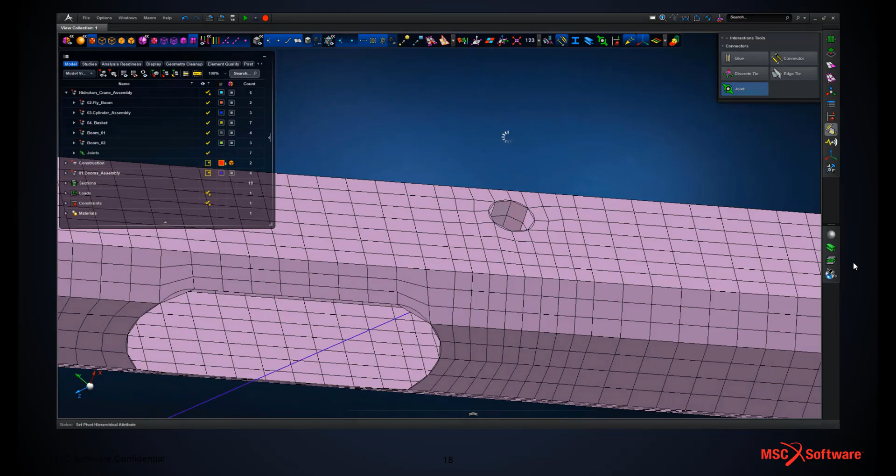So here we're building a revolute joint, which is effectively allowing rotation about the axis of connection and connecting the shell structure into the local bar structure. Again, those entities are developed in the model browser to see the specifics, or to modify them if necessary. If we look at the resultant BDF file that's written out, we can see the local grids, coordinate frames and connectivity that's defined.

We've got result exploration, so we've got the ability to import Nastran HDF5 result files to probe those results using 0D and 1D probes to develop scalar, vector or tensor plots at particular locations, or even over a path or a curve drawn on a model or mesh.

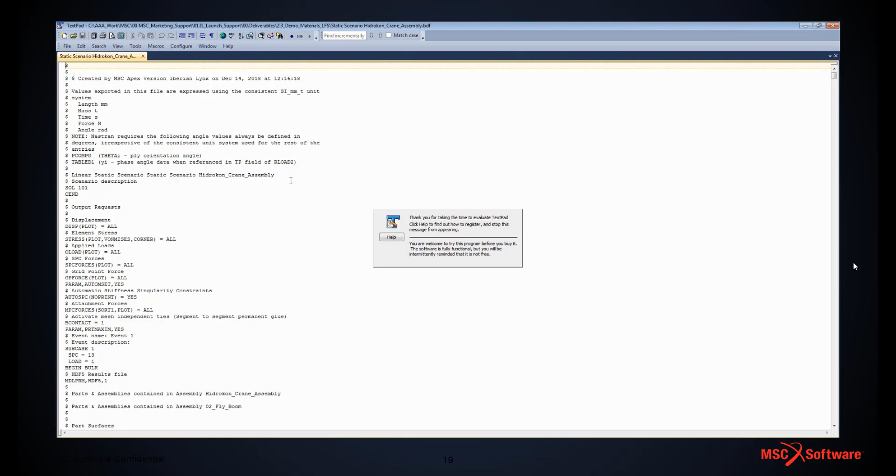Finally, within this Iberian Lynx release, we've now got the ability to write out those results to an external CSV format, and we can look at this structure to show how we could export the bulk data file, and look at the bulk data file that's created. We can do this on a single file or an include file definition.

We can run the Nastran result or generate the Nastran results externally, and then read that HDF5 file back into the Apex environment. Just bringing that in, importing the results, and the results are brought in successfully. And we can now post-process.

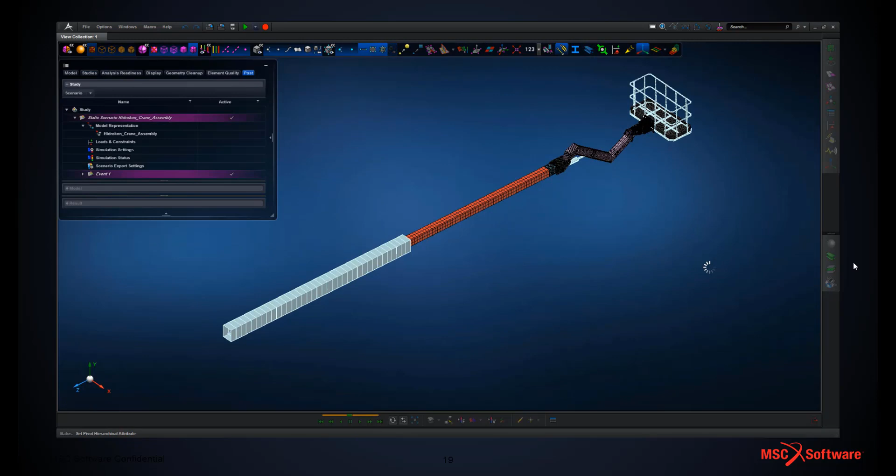So we're going to look at a quick animation of displacement, and then we can look at discrete results. In this case, we're looking at the beam element section outputs based on the combined axial and bending stress, and then we can look at using the 0D cursor to pull out discrete results.

This is very visual, so it's very difficult to make mistakes when you can see the output explicitly. We can generate a table of those probe results and modify the table if we need to, and then write that data out to a CSV file for external post-processing if we need to.

Some of the Iberian Lynx customization and automation enhancements: we've now included scripting support for both analysis and result exploration. Previously we only had it for model build, but now we can effectively black box the whole process by including analysis and result exploration. We've got the ability to custom develop or custom define tools within the Apex environment, as we've seen with one of the earlier examples looking at fastener build.

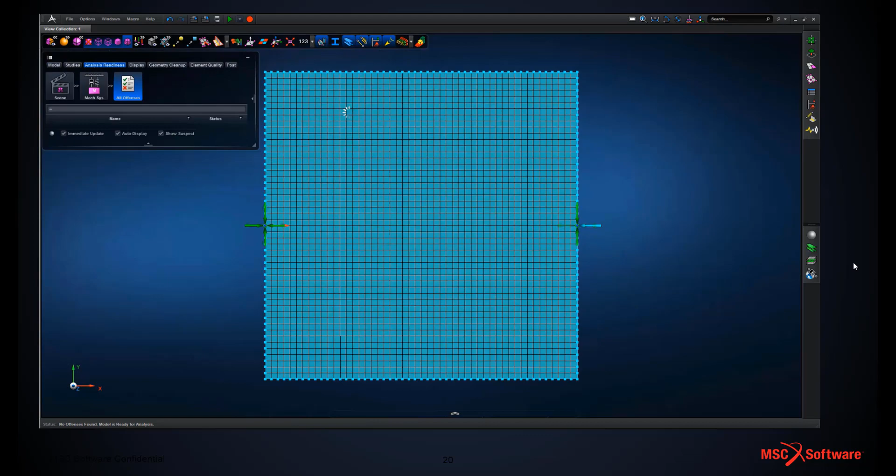We're just going to look at this quickly. So here we've got a simple example, a simple macro which defines the geometry of a buckling panel under compression. We can run that script, and we're handling the model build, so mesh, geometry, mesh, properties, loads and boundary conditions, but we're also invoking the Apex solver and result exploration through that automated approach as well.

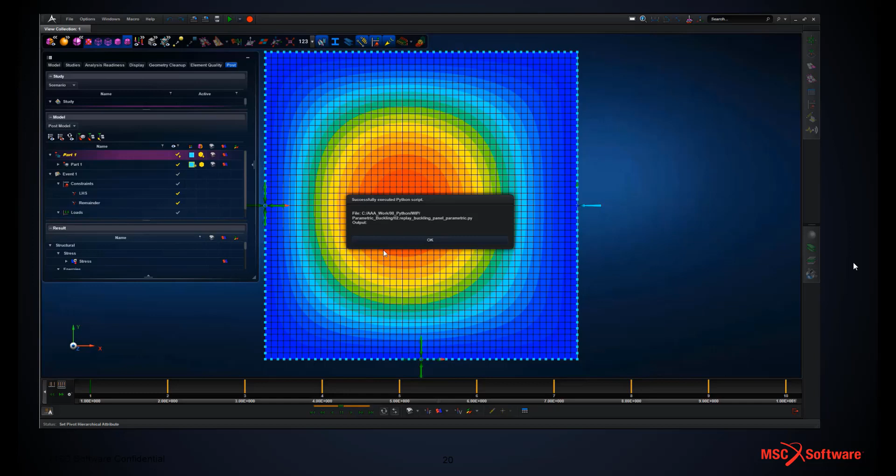So we get all the way through from a single click of a run script button to having results in the environment with no manual input whatsoever. This opens Apex up to parametric studies and/or the ability for less experienced engineers to take advantage of the full FEA model.

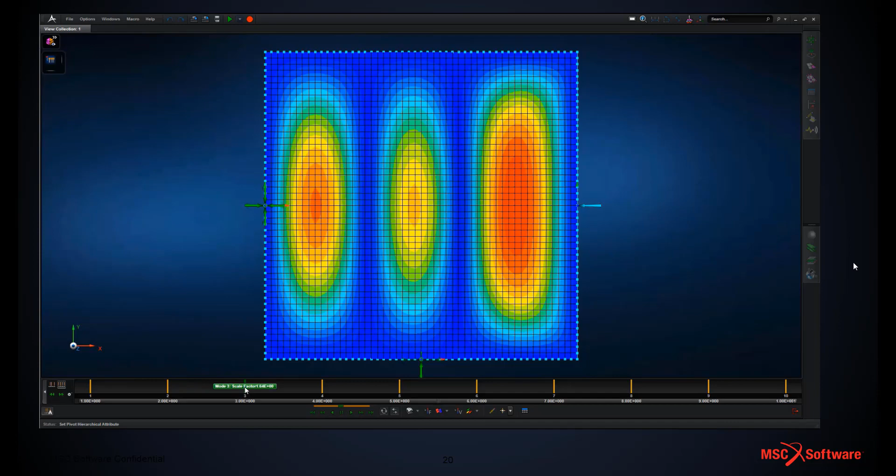So second scripting example here. This one introduces the concept of the custom tool environment. So we've got an Apex script set up, and the custom tool is set up to read that in by the graphical user interface.

So we've got a family of parts here, so we could effectively define this based on all sorts of different dimension and model criteria. But once we've got the inputs that we're happy with, we just press the green button to accept the inputs, and then the model runs, or the macro runs and builds the model.

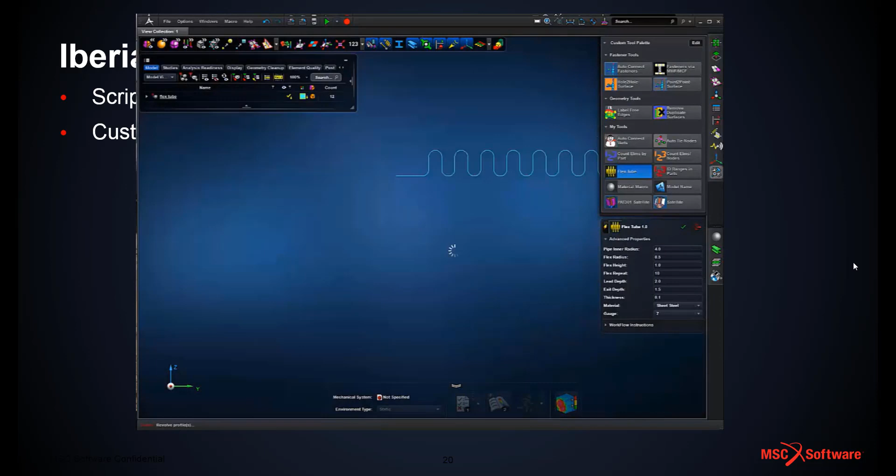So we've got a sort of flexible tube arrangement here. So building the geometry, so sketch and then revolve that round, mesh the structure, and then we've built the model completely. We could have in fact included the analysis and result exploration within this script, but we can see the model response based on those initial parameters.

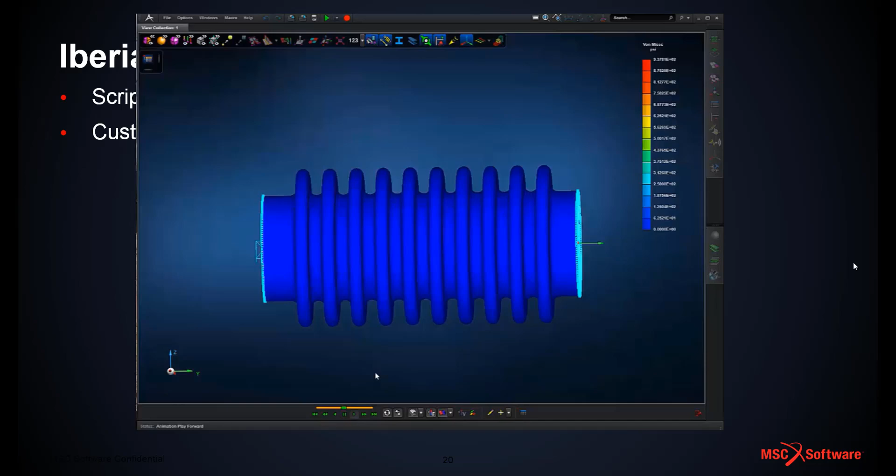So once we've got this defined, we've got full control of the model. The key thing here to say is that Apex really now is a game changer. There are multiple technologies in the Apex environment, which mean we've got a model build, solve, analysis, solve and post-processing capability unseen before in terms of legacy tool sets, and really now it's open to you to use and to take full advantage of that technology.